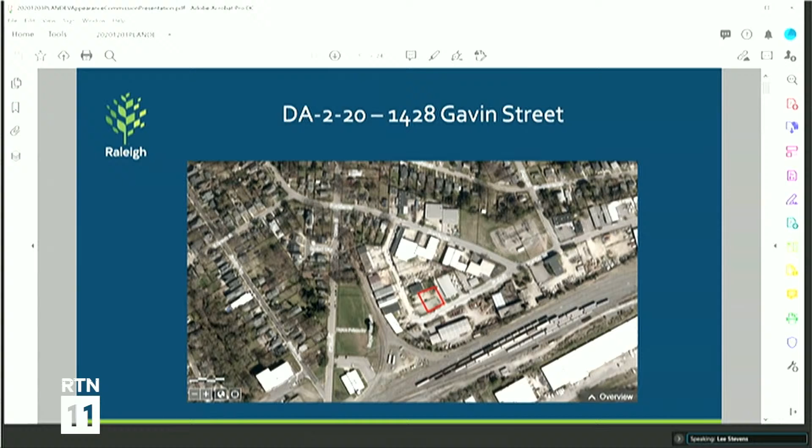The applicant states that the intent of the required cross-access is met through the relocation of a shared driveway with the lot to the east. The applicant states that the size of the lot is too small to provide cross-access per UDO standards without impacting the developable portion of the site. This site is zoned IX3.

I would say both the first and second, and then the fourth, are very easy to comply with. Given the physical environment, compliance is not physically feasible. As stated, this is a small lot. Providing additional cross-access to the west would really put an undue burden on the site physically.

Compliance would not meaningfully improve connectivity. I believe we meet this one as well, since we are providing cross-access to the east. The site to the west, as I've stated a couple of times, functions as a corner lot, so they would potentially have access to the south and the west.

The burden of compliance is not reasonable in light of the size of the site or intensity of the development. The subject lot is less than 12,000 square feet, and providing cross-access to the adjacent lot to the west would place an undue burden on the site's development potential. So those are our responses to the findings. If there are any questions or if you need clarification, I would be happy to answer.

Great, thank you, Kimberly. This is Michael. She did a great job covering the findings, so we'll leave it at that. Myself, Kimberly, and Jerry are here if the commission has any questions. Thanks.

Sorry, I'm unmuted. The applicant is requesting several items. First, a design alternate for a 4,000-foot maximum block perimeter requirement set forth in section 8.3.2.A of the UDO, that results in a block perimeter of 24,320 feet. A design alternate for relief from the cross-access requirements of section 8.3.5D of the UDO between the site and its neighbors to the south and to the west. A design alternate for relief from the stub street requirement of UDO section 8.3.4C, to extend Partin Road stub street south along the western boundary of the subject property.

And a design alternate for relief from the following roadway and streetscape requirements for the northern portion of Freedom Drive, an avenue 2-lane divided street set forth in section 8.4.5B: 1, a 7-foot design adjustment to the maximum back of curb width of 48 feet; 2, a 2.5-foot design adjustment to the minimum planting area width of 6 feet; and 3, a 1-foot design adjustment to the minimum sidewalk width of 6 feet. And relief from the following streetscape improvements for the southern portion of Freedom Drive.

Industrial street set forth in section 8.4.7.a: 1, a 2.5-foot design adjustment to the minimum planting area implement planting width requirement of 6 feet, in order to construct a general building for warehouse and distribution and light industrial uses on a 27.84 acre property zoned IX3 and IX3 conditional use.

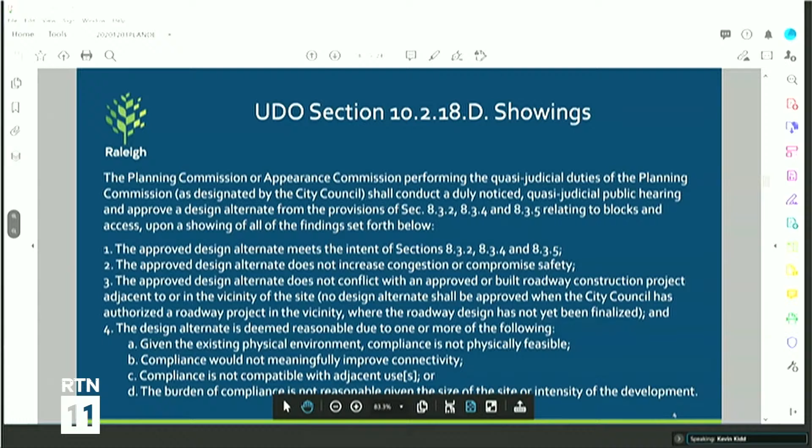Okay, if there aren't any questions for Mr. Kidd, then you can move on to the applicant's case. Jamie Schradler is the attorney, so we'll go ahead and acknowledge Ms. Schradler. And again, as a reminder, you provided all of your documents ahead of time, but please submit anything into the record as needed.

Thank you, Ms. Hill, and good afternoon, Mr. Chair and members of the Commission. I'm Jamie Schradler at 301 Fayetteville Street, here on behalf of the applicant and property owner, Freedom Industrial Park, LLC. At this time, I'd like to ask that our application, presentation, the case report, and all supporting materials be accepted into the record.

Thank you, will do, thank you. We do have several witnesses, Mr. Corey Howell and Mr. Travis Fluid, that you heard sworn in. They're both with the firm of Kimley-Horn and can help answer some technical questions as we go along. Mr. Parker is here on behalf of the property owner and will be available for questions.

Because our requests overlap substantially, we've prepared our presentation to go through all 4 design alternate requests and then make the witnesses available at the end if that's okay with the chair. That is fine, thank you.

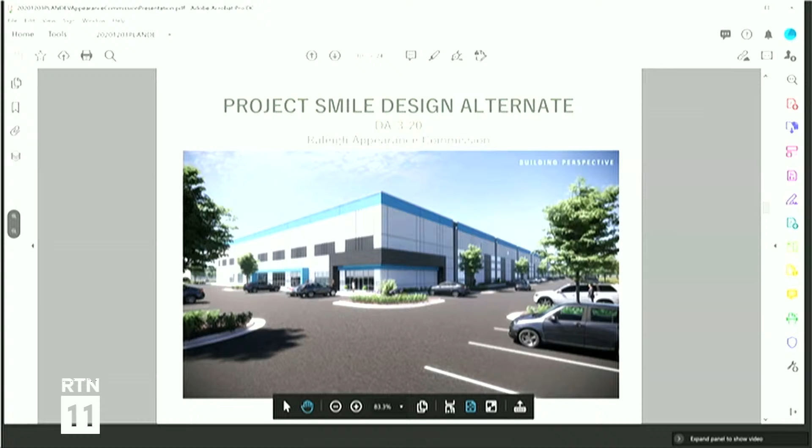Thank you, next slide please. As Mr. Kidd explained, this request is for 4 design alternates related to an industrial development project on New Hope Road: the block perimeter adjustment, relief from cross-access easement requirements, relief from stub street requirements to extend Partin Road to the south, and adjustment of roadway and streetscape requirements on Freedom Drive to tie into existing street sections. Ironically, this case is in a similar posture to the one you heard earlier, in that requests 1, 2, and 4 were granted by the Board of Adjustment as design alternates on a prior site plan in December of last year and in July of 2020, based on the same criteria you'll be called on to evaluate today. These decisions were included in the submitted materials in your packet for reference.

But since that time, a new tenant has approached us, and this resulted in some site plan changes that required us to go back through the request process, much like the case before. But like the Board of Adjustment found prior, these design alternates are justified under the UDO standards, and we'll present evidence on each. I'd like to note, just to avoid confusion, that the 3rd request related to the stub street did not apply at the time this case went through before, and so only 3 of the 4 requests were considered then. Nevertheless, we'll present competent material and substantial evidence on each.

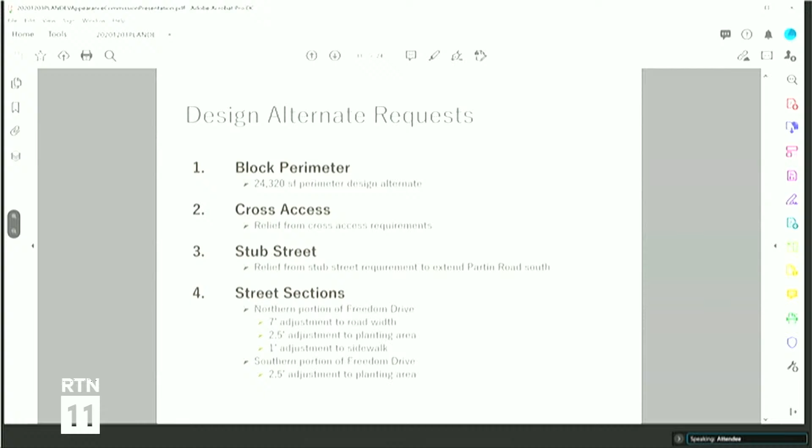Next slide please. The project is 28 acres compiled across 10 parcels highlighted in yellow there. Next slide please. The first request we'll go through is for relief from block perimeter. To walk through these requests, I'd like to call Mr. Corey Howell to testify.

My name is Corey Howell, and I am a licensed professional engineer in the state of North Carolina. My address, as was mentioned earlier, is 421 Fayetteville Street, Suite 600, Raleigh. I have a Bachelor of Science in Civil Engineering and over 15 years of experience in land development design.

Thank you, Mr. Howell. Have you reviewed the proposed site and plan for its compliance with the requirements for a design alternate? Yes, I have. My firm designed the plans. I was a part of that design and have also reviewed the plans.

Thank you. Can you explain the block perimeter request? The design adjustment from the maximum block perimeter of 4,000 feet is necessary on this site due to the existing block, which is already extremely large at approximately 25,480 linear feet, shown in red on the exhibit. The proposed block perimeter, outlined in blue, is 24,320 linear feet. The block is so large that no public streets through the site will meaningfully improve the connectivity in the immediate area.

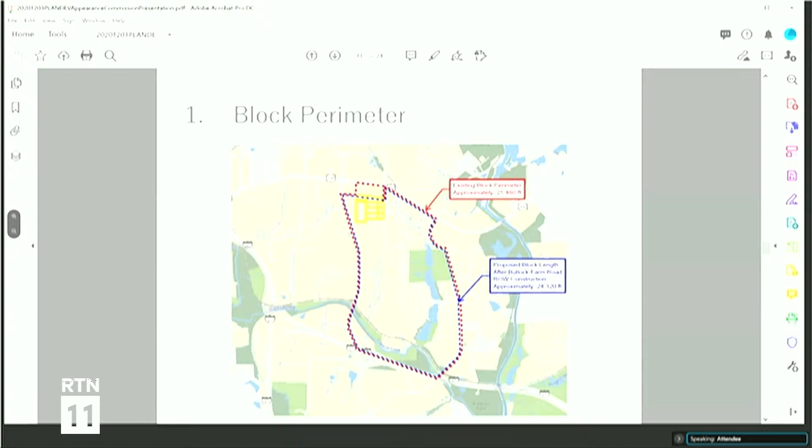Thank you, Mr. Howell. Next slide, please.

A couple other points here: the use and the surrounding properties also make a public street grid fairly difficult to achieve, since the proposed use is an industrial and warehouse facility, as shown on the site plan. The facility will have one large, long, rectangular oriented building running north-south, with a truck delivery court on the western side and employee parking on the southern and eastern sides. The nature of the industrial use requires large buildings capable of flexible space for a variety of uses inside, requiring truck access and turnarounds in a way that typically conflicts with a tight road grid.

As part of this project, one thing we want to point out is that we are completing the Bullock Farm Road extension, shown in blue along the north side of the site. That's over 1,100 feet of new road that will connect Partin Road on the west to Freedom Drive on the east.

A couple other things to point out: on the west side of the screen, the property is bound by an existing development that really makes additional roads impractical. The lots along the western side of the property mostly have existing buildings on them that front along New Hope Road, just on the other side of those buildings.

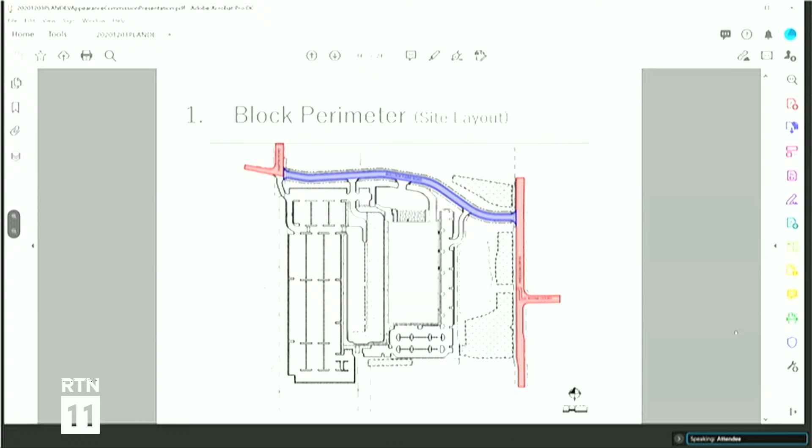Thank you, Mr. Howell. Next slide, please.

We'll move into the next request, for cross-access relief. This request is for relief from cross-access easement requirements between the proposed industrial site and the parcels to the south and west, shown on the screen with red stars. The yellow denotes the areas where we're seeking relief from cross-access easements, and the green areas show all of the opportunities for cross-access in other directions that we are providing.

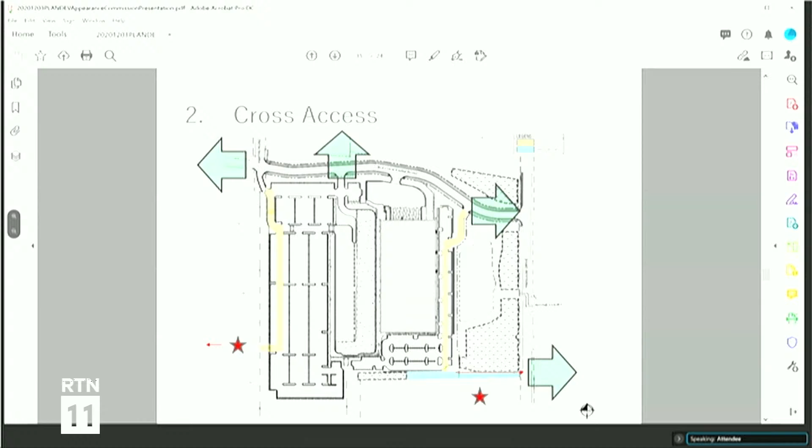Mr. Howell, can you explain to the board why cross-access is problematic in the areas shown in yellow? Yes. The parcel to the south is occupied by a Mobile Home Park, and this property actually has an existing recorded access easement to Freedom Drive, shown in blue. If you wouldn't mind advancing the slide, we can show that easement in closer detail. As mentioned, there is an existing cross-access easement to the south that will remain in place to provide connectivity along the shared property line.

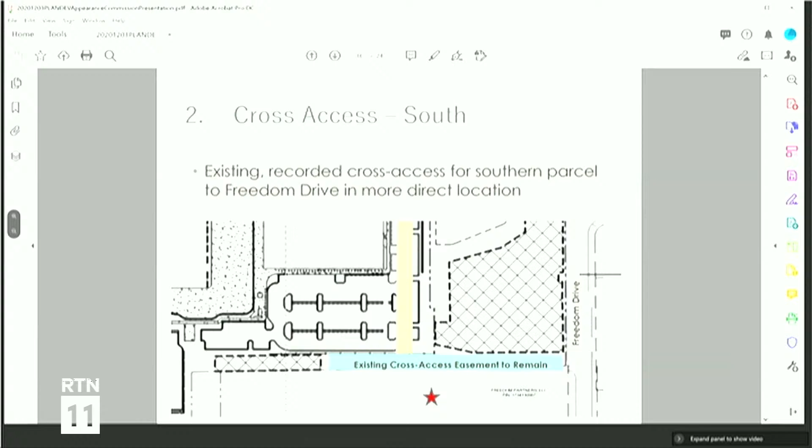Next slide, please. This parcel to the west, which I mentioned earlier, is similar to the parcels to the north and south, having frontage on New Hope Road and direct access there. So lack of additional cross-access through our industrial site will not increase congestion or meaningfully reduce connectivity. Lastly, I think requiring these cross-access easements would not be compatible with the adjacent uses.

Thank you, Mr. Howell. As shown on the screen, to the west the property is owned by Bradco Supply Corporation. Are you aware of their activities of industrial use and storage as shown on that aerial? Yes. Would that also make the property inconsistent for cross-access use? Yes. Thank you. I believe we can advance to the next slide.

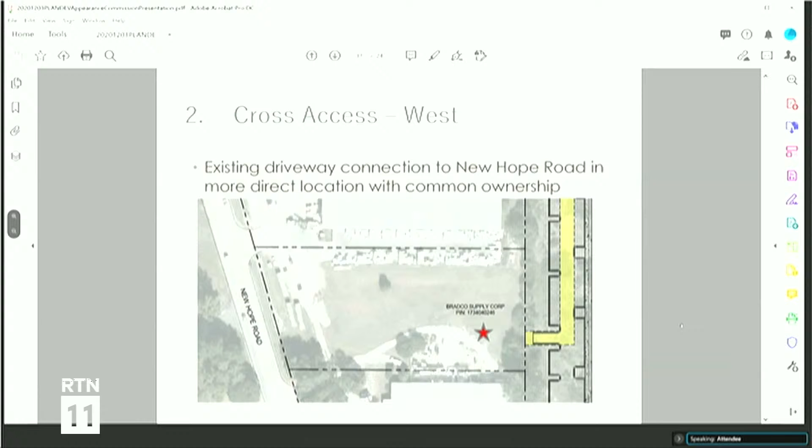Mr. Howell, can you explain to the board what this slide conveys?

Yeah, so a couple things here. This slide shows the existing tree conservation areas that are required, which are hatched in green. These are the only viable TCA areas shown, along the eastern and southern edges of the property. So having additional road connections to the east would be difficult.

One other thing to point out, shown there in orange, there is an existing zoning condition that requires screening of the mobile home park located to the south. That was a requirement for this project when the property was rezoned, so in effect we're trying to honor City Council's request to provide additional planting in this area shaded in orange, in addition to the tree conservation areas hatched in green, instead of a connection or additional roadway here. That was really important to council, and they were very concerned about buffering and separating the proposed industrial development from the existing mobile home park, as long as it's used as a mobile home park.

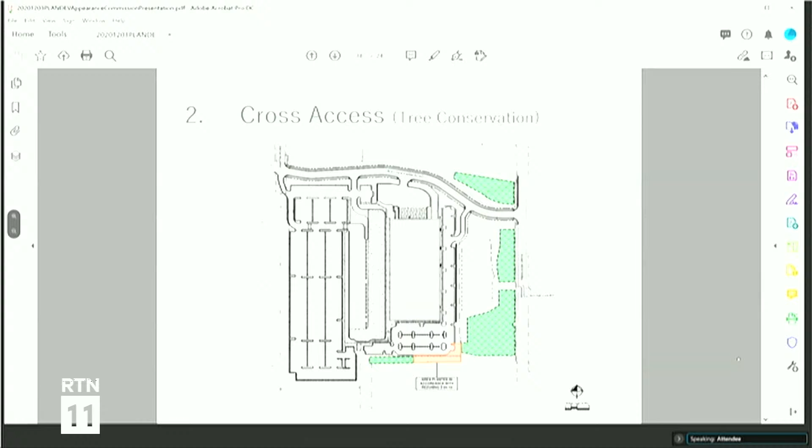Thank you. And does that same justification support the first request for the extension of block perimeter, and that those difficulties would exist in extending Partin Road for purposes of connectivity south? Yes, that's correct. Thank you.

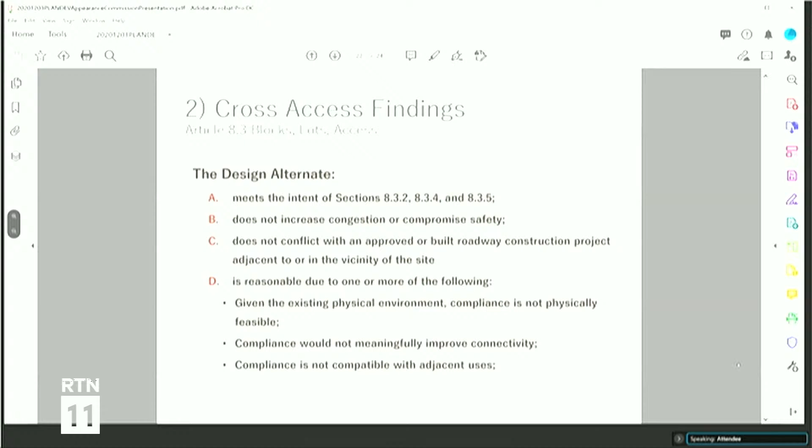Next slide, please. We've also met the stub street findings in request number 3 because the overall intent of this section is to extend connectivity where possible, but here the Parton Street extension would conflict with those existing buildings to our west, as Mr. Howell testified. Again, we have testimony that it won't increase congestion or compromise safety or conflict with a built construction project. And here it's reasonable because of the physical environment of those buildings. Compliance is not physically feasible and would not meaningfully improve connectivity because we've done that as best we could with the Bullock Farm Road extension.

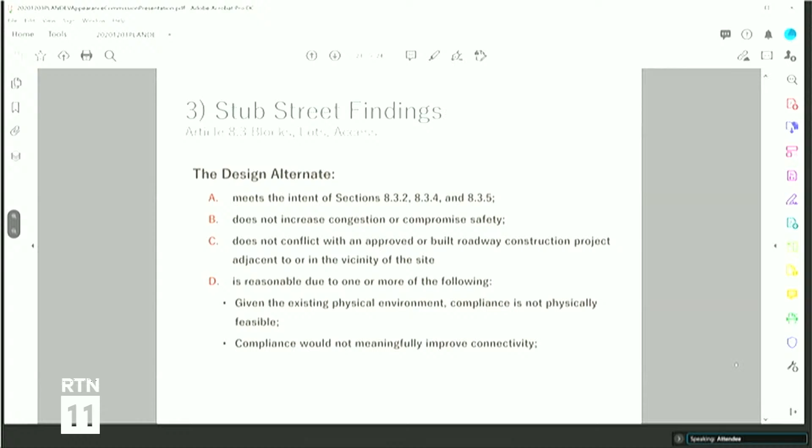Next slide, please. And finally, with the 4th design alternate, we meet the criteria for the change in the street connections because, again, we've met the findings of congestion, and you heard from expert testimony that we do not create additional maintenance responsibilities for the city. The plans have been designed and certified by a professional engineer, will not adversely impact stormwater collection and conveyance, and is reasonable due to the existing physical environment of trying to tie in the street sections both to the north and the south with the existing sections that are there today, and providing a reasonable transition from the different street section.

Because we believe we've met our burden in providing competent, material, and substantial evidence in support of each of the elements of each of the 4 requests, we'd request that the design alternates be approved today, and we're happy to answer any questions that you have on this matter.

Okay, do any commission members have any question for the applicant or any of their witnesses?

You can go ahead and ask if staff has anything additional to add, or any questions for staff. Nothing to add. I have nothing to add other than I'm here for any questions.

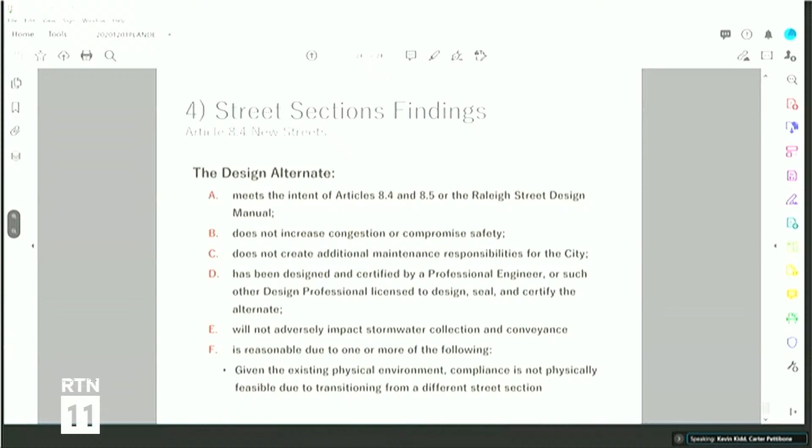Mr. Roberts, I can take that question. I was the reviewer of record on this project, both this site plan and the one that preceded it. At Freedom Drive, we have two different street types that an intersection is created with a new Bullock Farm Road. You have an Avenue 2-lane divided section to the top, which would be a 76-foot right-of-way on the comp plan, and to the south of that, we have an industrial street type. Thank you for the exhibit. Where you see in purple, that would be a 69-foot right-of-way at full build-out, and we have a 76 just above it on Bullock Farm, which would be the ultimate build-out.

We had a city project that came through there and did some sidewalk work, and what was discussed was more of an observation that if you shift the curb one way or the other, it creates a bit of an offset, and similar with sidewalks. So that was the discussion, and the developer presented this that you see today for your review.

So in your opinion, it does line up with the conditions on either side? Moving with this keeps an aligned curb where pedestrian access is much easier, just from a pure visibility and access standpoint. So it is atypical to have an Avenue 2-lane divided run into an industrial street. That was set up that way largely because Bullock Farm Road is also on the comp plan, so there's a recognition of that intersection that was coming through.

Thank you. Anybody else have any questions?

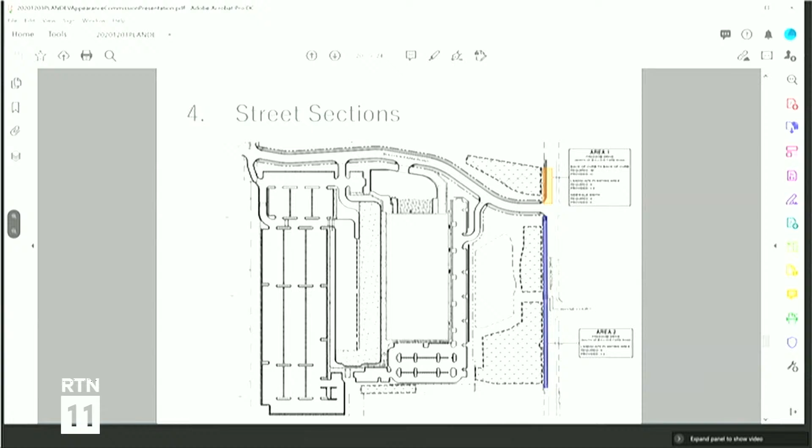Okay, there's nobody else signed up to speak in support or opposition. Since Mr. Kidd was able to answer a question, Jamie, did you have anything else you wanted to add? No, I believe that's consistent with our understanding, but we're happy to answer any other questions that come up.

If the commission members don't have any more questions and there's nobody else signed up to speak, then Mr. Chair, you can go ahead and close the evidentiary hearing and the commission members can deliberate and vote. Okay, I'll close the evidentiary hearing. Thank you, Jamie and company, for that presentation.

Any comments right off from the commission? This is Chris. I think it was very clearly presented, and I don't see any reason not to approve any one of these requests.

Thank you, Chris. This is William. I would agree with Chris, especially since staff confirmed that they agree with the findings as well.

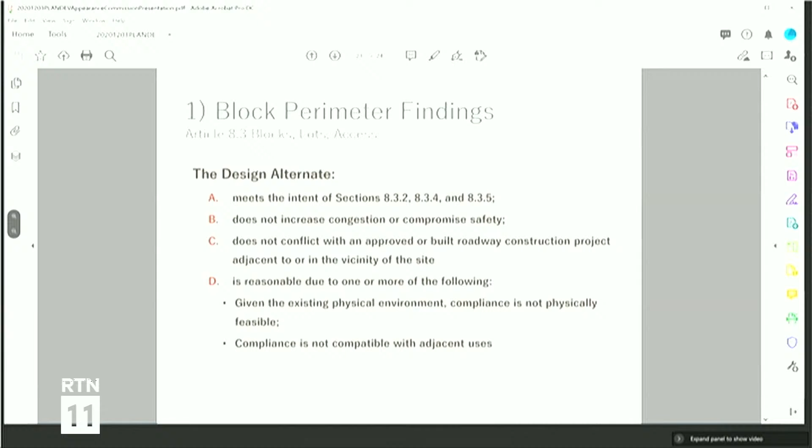Thank you, William. Any other feedback or comments? I tend to agree with both your comments, William and Chris. I think with the prior approvals with 1, 2, and 4, and discussion of really no change to what has been presented before, with the testimony provided from the attorney and the findings outlined in the presentation, I think it's pretty clear, and I think it's worth moving forward as presented.

Any other comments? If not, I'll move to approve with the presentation as outlined.

Are we doing the findings all at once? Yeah, that was a question I had for our attorney, Catherine. My understanding is that it all goes as one vote. Is that correct? You can vote on them separately, but if your motion is to approve all 4 of them, you can make a motion with them all consolidated. That's fine. So my understanding was single, but if people would like to separate them out, I think that'd be fine. My motion would be to approve all 4 as stated in the presentation and provided.